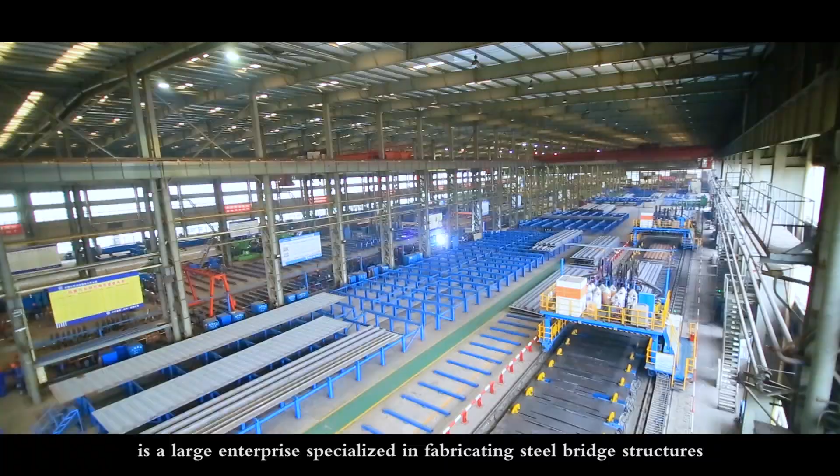China Railway Baoji Bridge Group Company Limited, hereinafter referred to as CRBBG, as a second-tier subsidiary of China Railway Group Limited of the Fortune Global 500, is a large enterprise specialized in fabricating steel bridge structures, railway turnouts, and urban rail transit facilities in China. Now, CRBBG takes the lead on these main products in China.

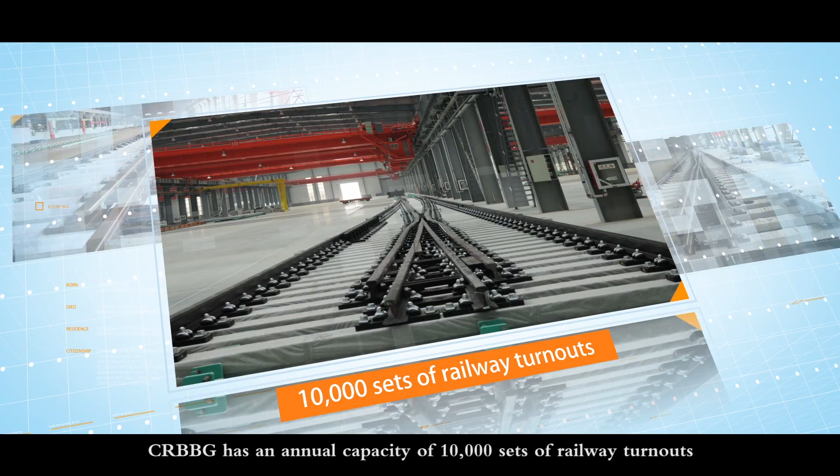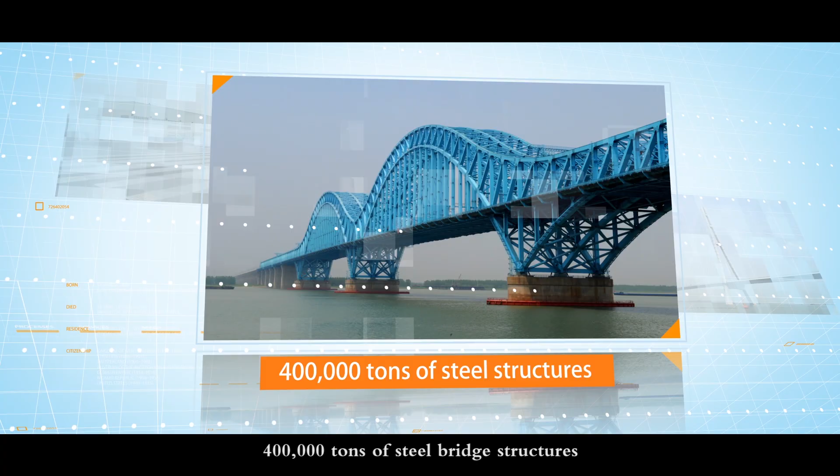CRBBG has an annual capacity of 10,000 sets of railway turnouts, 20,000 pieces of high manganese steel crossings and alloy steel crossings, 400,000 tons of steel bridge structures, and 50 sets of maglev switches and monorail switches.

A turnout is a track connection equipment enabling rolling stock to be guided from one track to another, which plays a crucial role in railway lines.

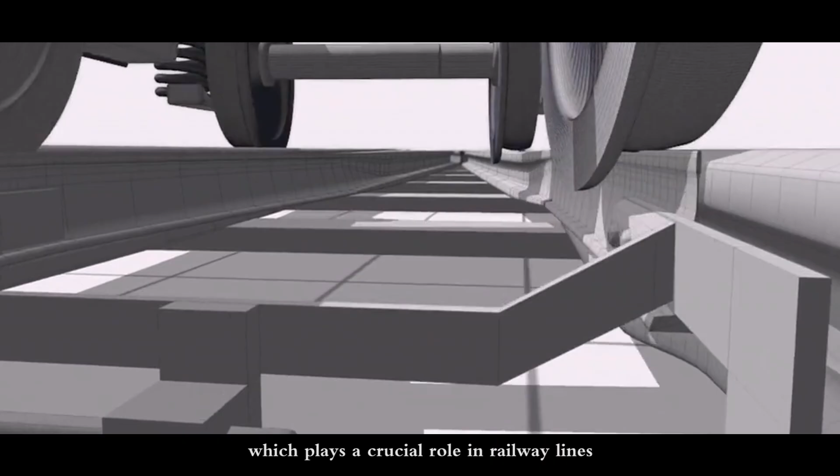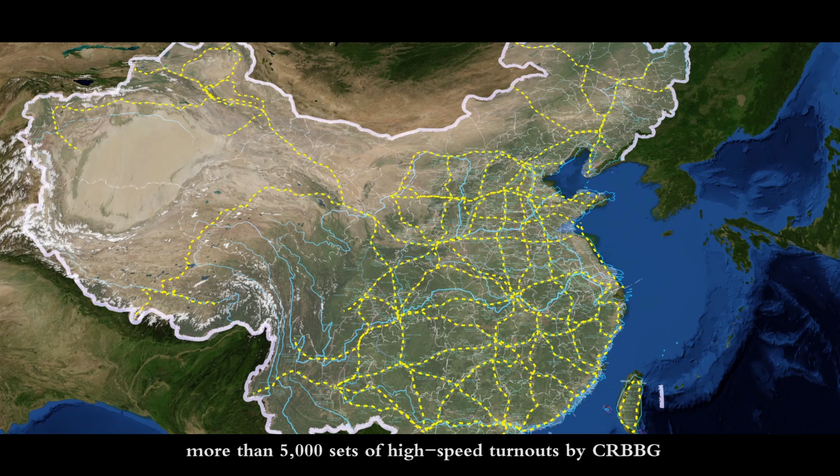Since 1966, more than 100,000 sets of turnouts supplied by CRBBG have been widely used in China's ordinary speed railway, high-speed railway, heavy haul railway, urban subway, and tram. Since 2007, more than 5,000 sets of high-speed turnouts by CRBBG have facilitated Chinese railway speed from 120 km per hour to 350 km per hour.

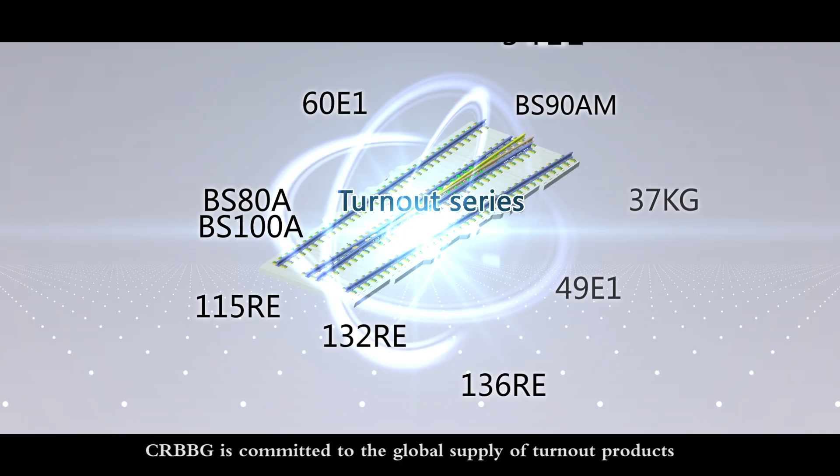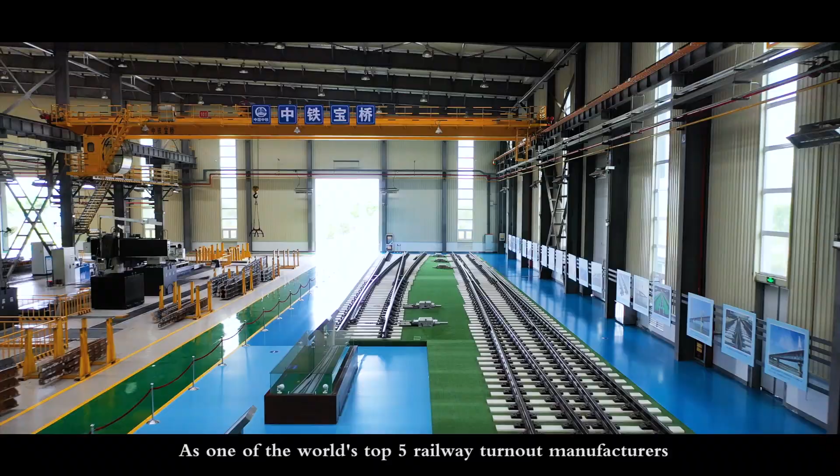CRBBG is committed to the global supply of turnout products. Since 2000, 5,000 sets of turnouts and 40,000 pieces of crossings have been exported to more than 30 countries and regions around the world. As one of the world's top 5 railway turnout manufacturers and the largest export enterprise of CMS crossings, our design, manufacture, and quality of the products can satisfy international railway standards such as EN, UIC, and AREMA.

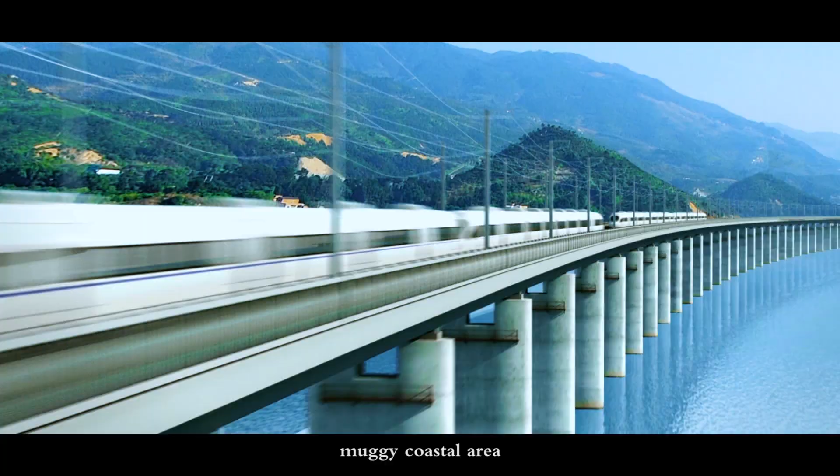No matter you are in an extremely cold area, muggy coastal area, secluded desert, or crowded subway, tens of thousands of turnouts by CRBBG keep your security and fulfill your travel dream.

CRBBG has more than 100 experienced track engineers who can provide customers with safe, reliable, and comfortable turnout solutions through on-site surveys, technical exchanges, theoretical calculations, and 3D modeling.

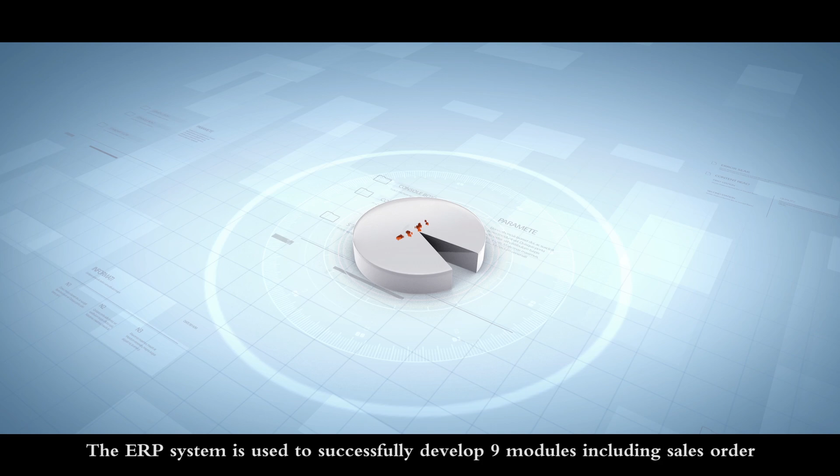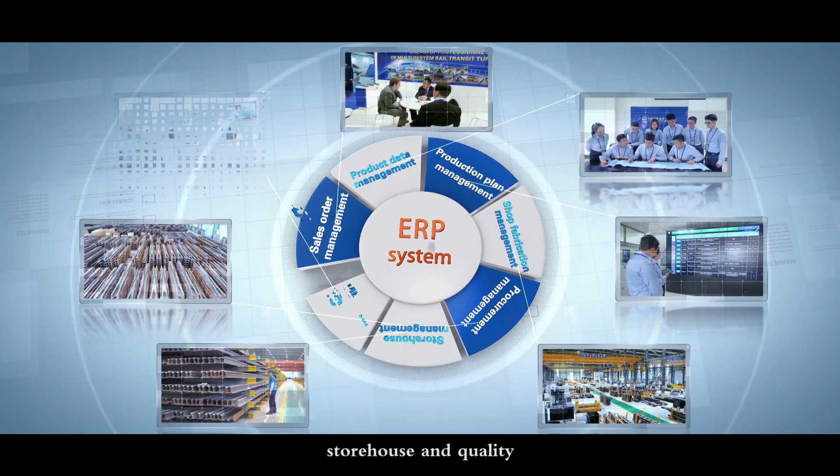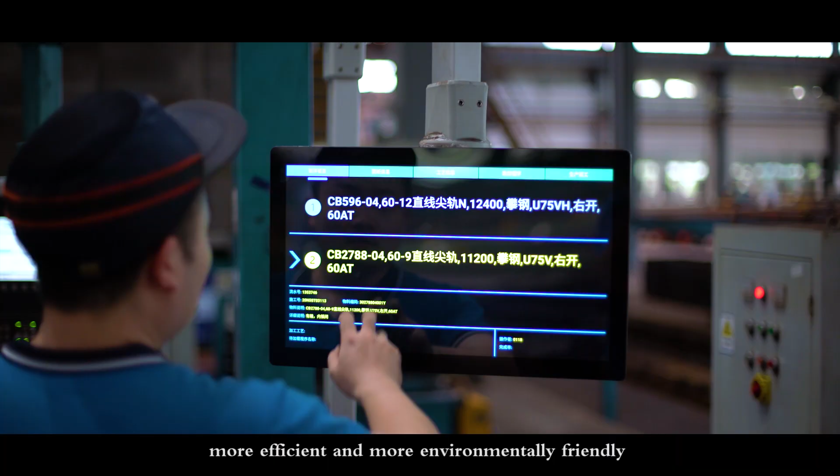CRBBG has been certified to ISO 9001, ISO 14001, ISO 18001, and ISO 10012 respectively. The ERP system is used to successfully develop 9 modules including sales order, product data, production plan, shop fabrication, procurement, storehouse, and quality, which realizes the standardization, integration, and informatization of the whole process to make it more economical, more efficient, and more environmentally friendly, and to achieve traceability of product quality.

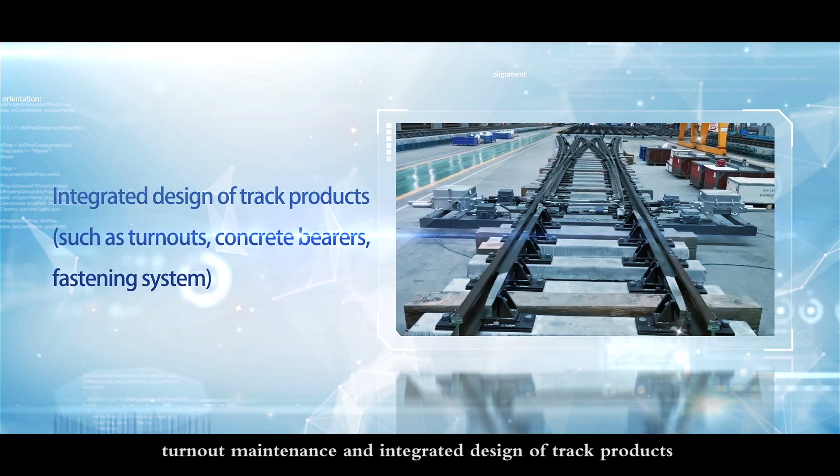CRBBG provides not only products, but also quality service, including personalized design, transportation to sites, on-site installation, client training, turnout maintenance, and integrated design of track products, such as turnouts, concrete bearers, and fastening systems.

Reliable, safe, and trustworthy, our turnouts turn out to be the best. We are CRBBG.